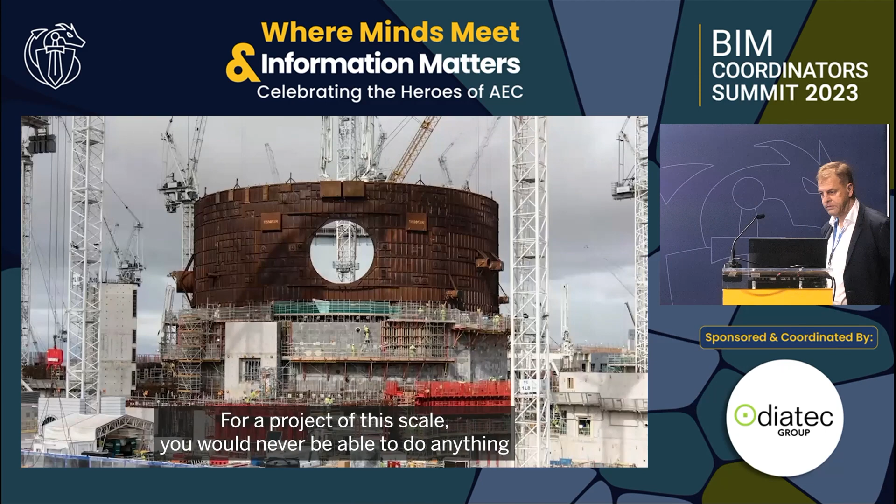We're at Hinkley Point at the new C reactor. Nothing quite prepares you for the scale of this project. This is just huge - it's complex, it's enormous. And we've been granted access today to the site and to some of the key players. Hinkley Point C is the first nuclear power station to be built in the UK for a generation. It's one of the largest and most complex projects in Europe because we are building two identical nuclear reactors concurrently. For a project of this scale, you'll never be able to do anything with paper, and we officially started using FieldView in 2017.

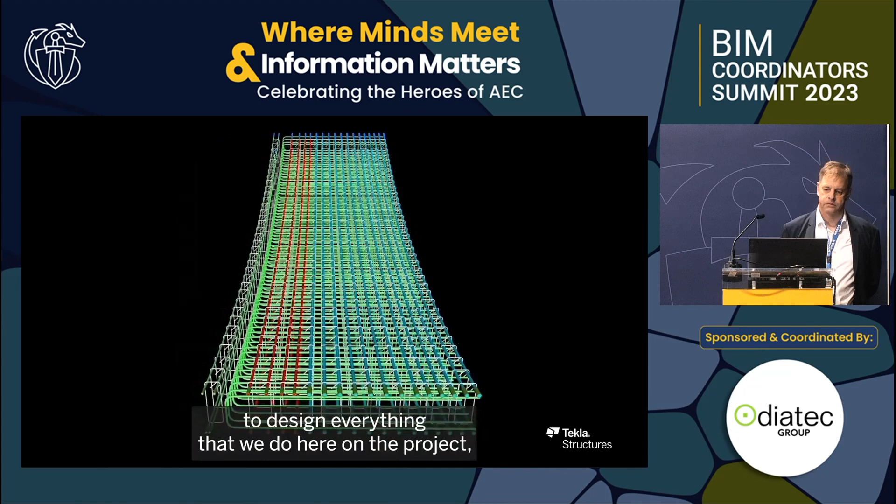The project has used Tekla to design everything that we do here on the project. And one of the things that's mind-blowing about Hinkley is the range of scale. We use the same detailing approach from a 1 cubic metre pour in the corner of a building to the UK's 2 largest ever onshore continuous concrete pours. Sometimes as the civils builders, we have to remind ourselves that we're just a small cog in the massive machine that is a nuclear power plant.

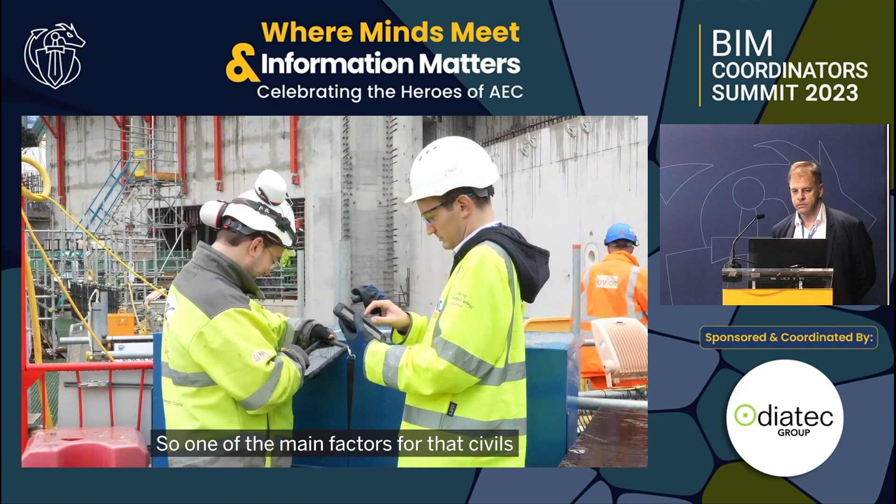So one of the main factors for that civils design is coordinating it with all the other parts, and it's only by looking in that 3D model that we can see how it all fits together. We chose early on to use IFC, and that's really proven to give us great flexibility to adapt as the industry adapts around us and as we develop. By working with IFC, where the information is issued and frozen and controlled, and we can tell who's made it, we can demonstrate that degree of control we need to deliver nuclear quality.

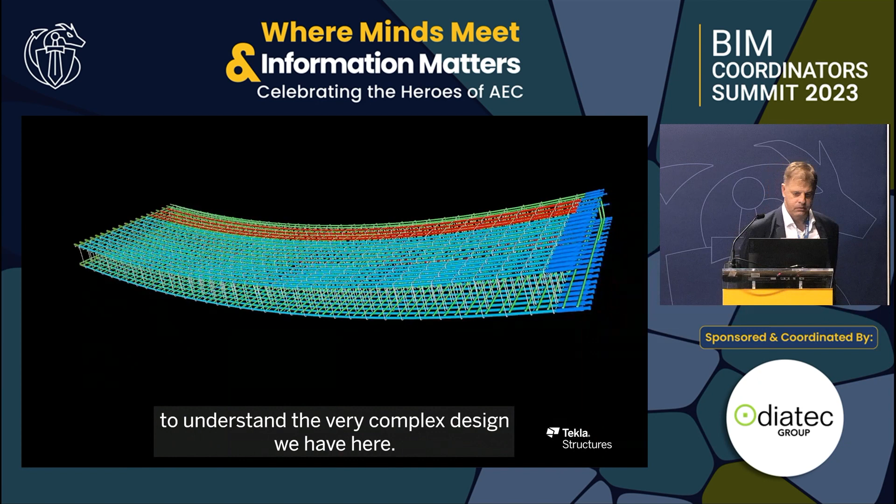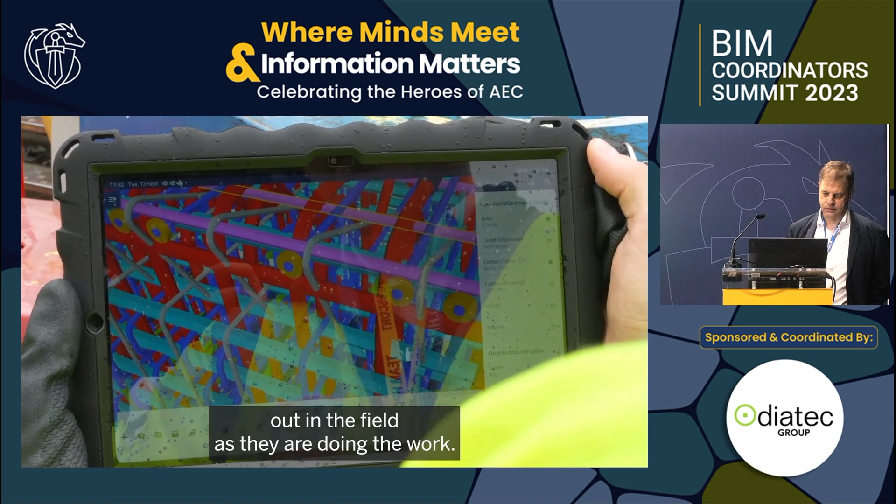Our workforce use Trimble Connect to understand the very complex design we have here - the sort of design that's difficult to convey with traditional 2D drawings - by giving the workforce the ability to view 3D models out in the field as they are doing the work. The API from FieldView allows us to pull the information being filled in the field up to every 10 minutes and deliver that straight to dashboards that our senior leadership and our client are looking at, sat up in the office.

So that gives you a very, very quick flavour for what this project is. And these are, I guess, issues which are spread wide actually throughout the industry. How do we get everything to work together? How does one process flow into another?

Now at Trimble, we've got a sort of mantra which is Trimble Construction One, which is really looking at our own product and how we begin to get the workflows to work between those. But we also have this thing about connected construction, which is really that wider issue - no single vendor is going to solve all of your problems. You should be able to use whatever is best for a particular job for you. And this means that kind of matrix of softwares that you saw in the last presentation - you saw some Trimble ones there and lots of others as well. That will always be the case.

So it's very much using those open formats like IFC, like BCF, that is a huge part of what is going to make this work for everybody. And remember, on something like a nuclear power station, working with something like IFC, which gives you longevity in your information, is also really important.

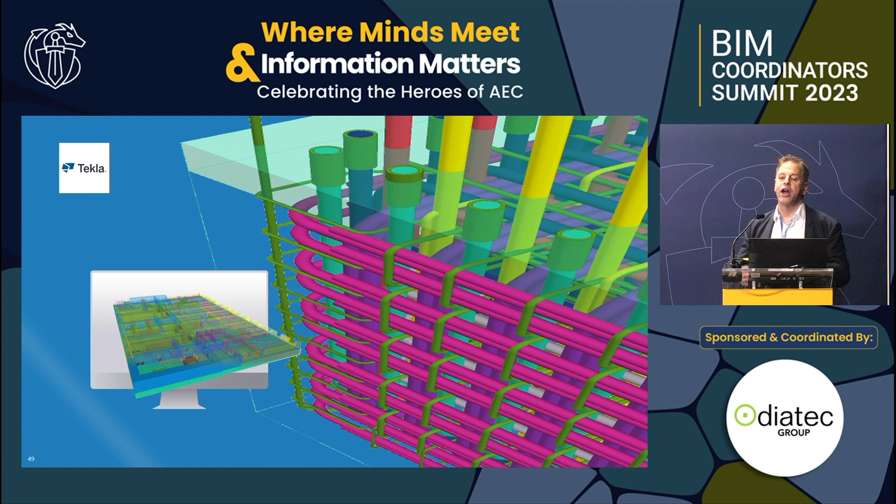So there we saw things start in terms of the rebar with design, doing designs in Tekla and structural calculations in Tekla Structural Designer, etc. A whole process of design iterations, bringing that together, which is then coordinated using IFC.

You'll note this is a nice distant view, so nobody can actually see what's going on here. It is a nuclear power station, so there's good reason for that.

But what you heard him say is that they then coordinate these bits of work with the other consultants using IFC, because they're all using different tools.

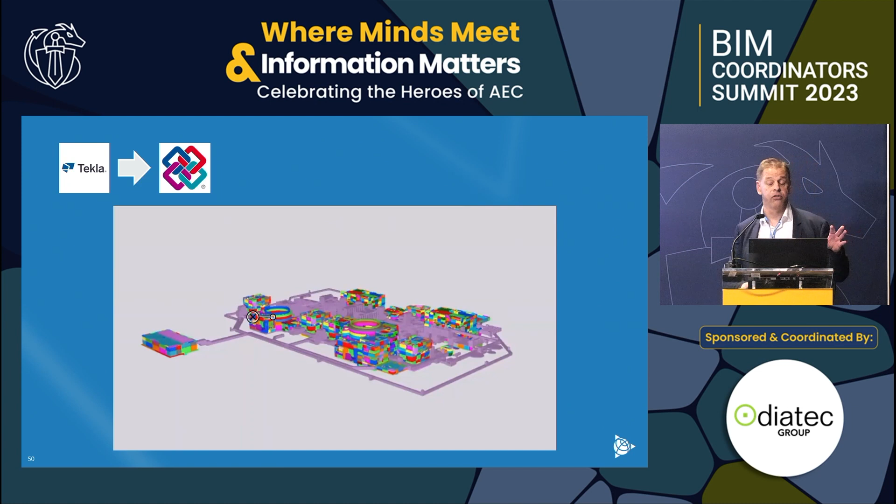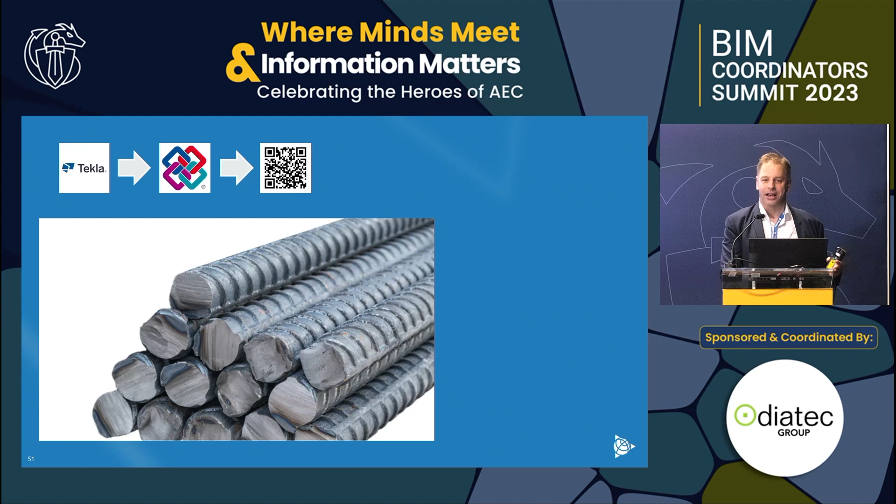Then they are selecting, fantastic process going on there. They're just selecting items within the model that they've made, sending them off to the subcontractor. They come back onto site with a barcode around them, which says what it is, and then they go into prefabrication of the cassette of rebar, which is then lifted into place. So even though the stuff's manufactured at the site, it is a prefabrication process, actually. Very interesting.

Then on site, they're using Trimble Connect, which is an offline tool, really important on a large site where you don't have internet connections all the time. They are using that to compare reality with the model.

Is this right? And then track completion using this tool, so that they can say, right, this is how far we've got at the moment. Now, the important thing here is that at Hinkley, they are not using, except in very rare occasions, 2D at all. Nothing is presented as a 2D drawing because these are complex things. Some of this rebar is 40 mil in diameter, huge stuff, really steels in their own right.

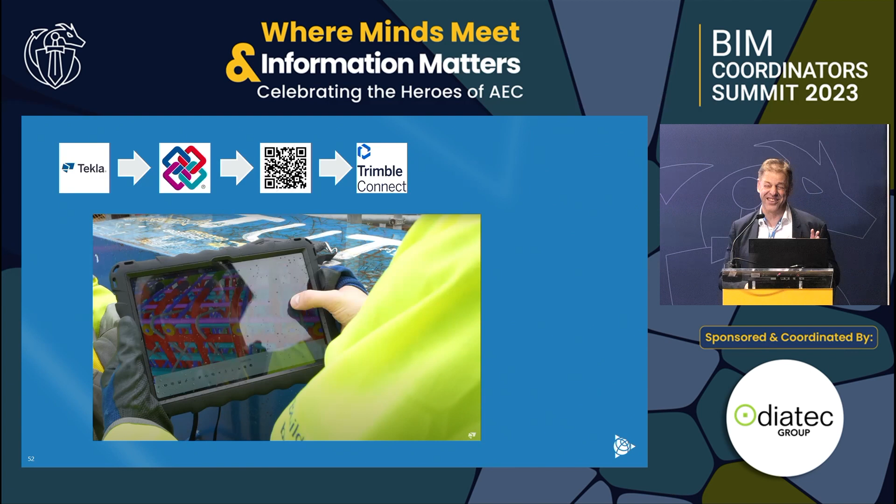So then, I've got 4 minutes left, so I've got to go some.

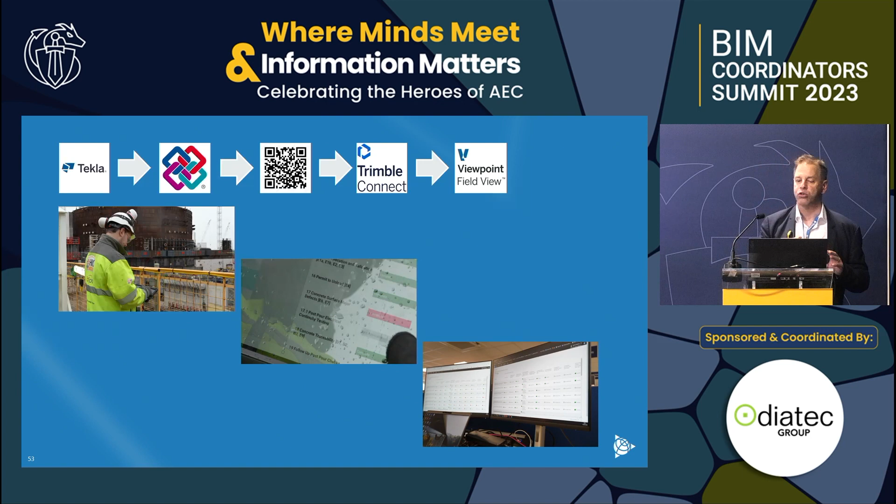So then they are also tracking all of the correctness, capturing in forms and data what's happening on site. So all of those sign-offs and so on are all tracked using Field View, our site tool, again an offline tool.

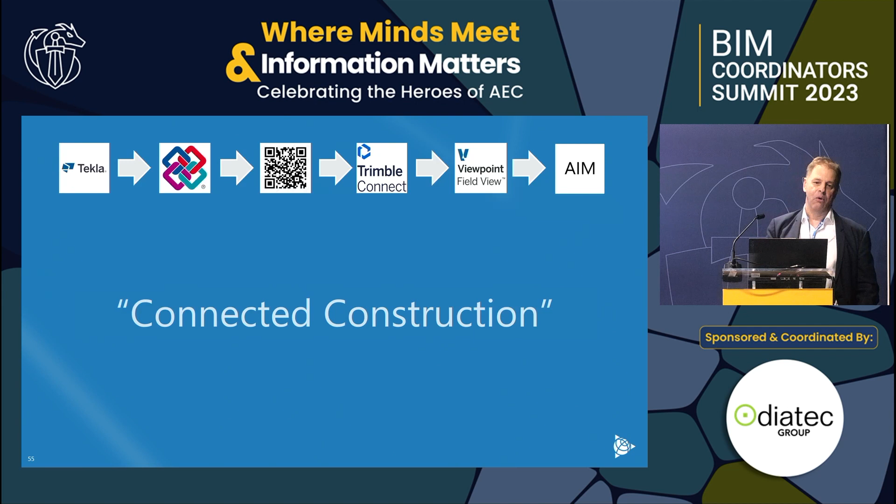So we're trying to take this forward with that connected construction story. We did an Innovate UK project with them because they were saying, well, hang on a second, we've got Connect working well offline and we've got Field View as a tool. We need the two to work together. So we did, a few years ago, an Innovate UK project.

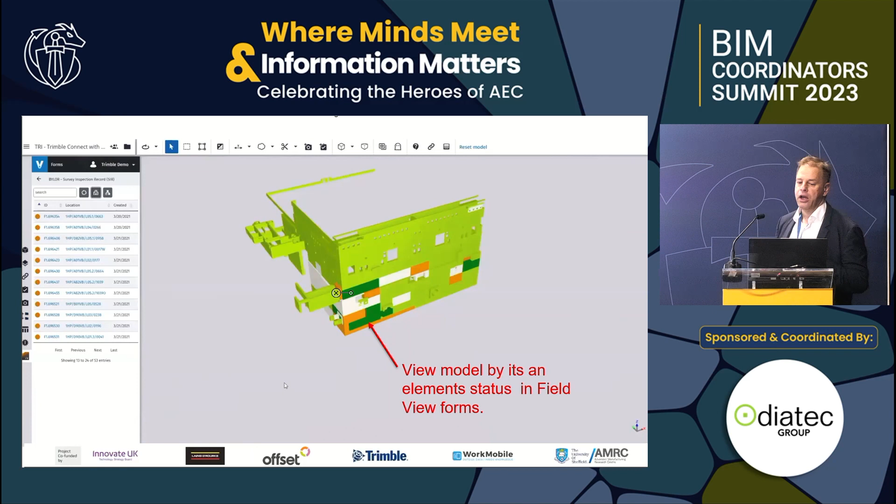So this is how a large project like this begins to influence what we, as a tech provider, do. We did the Innovate UK project with these partners, looking at making that link between the model and the forms of data that you are completing. So obviously you can view the model in Field View now in a way that you couldn't previously.

And this is, I think, the bit where it gets exciting. The data from the form that you are making can get pushed into an IFC property set. So it's beginning to be a way where you can capture all of that information in a future-readable format.

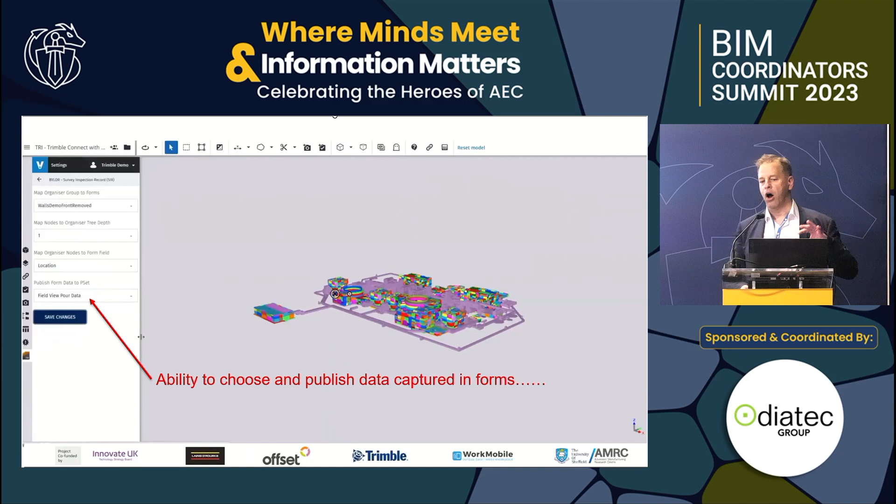So where are we now with this? Well, we've taken this on now and we are actually implementing it. So watch this space, it's short-term roadmap stuff. That's the pushing of the data into the property set.